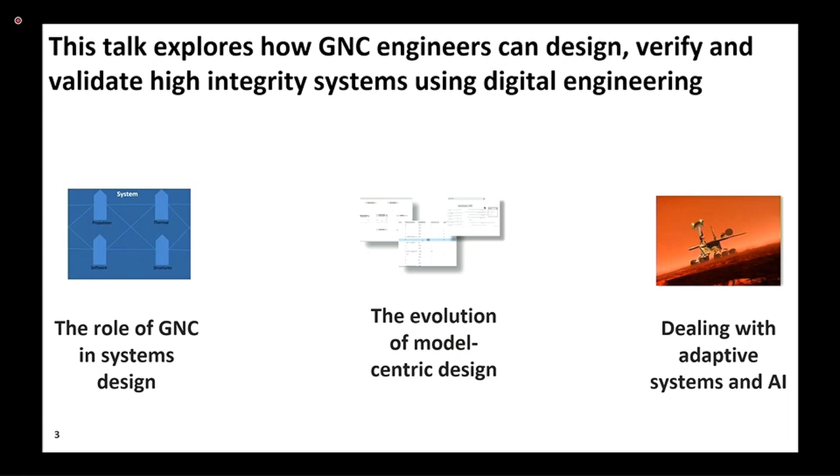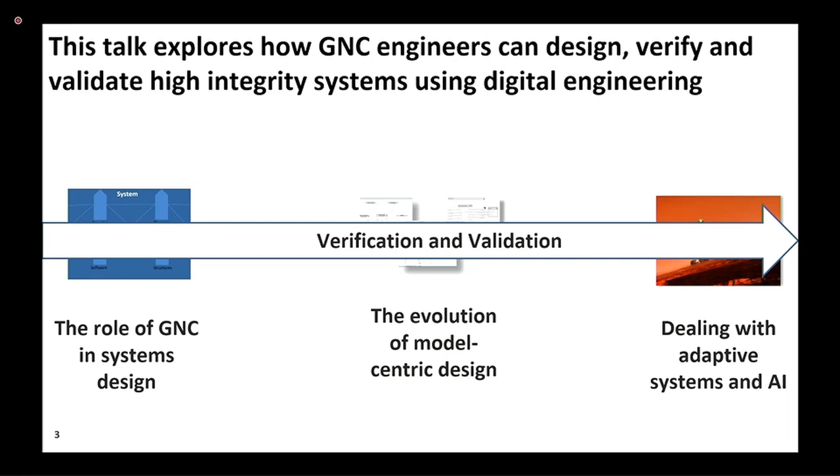And finally, it's hard to imagine a digital engineering talk these days without mentioning the role of artificial intelligence, machine learning, and deep learning specifically. AI is slowly but surely creeping into our industry. We'll highlight how and where it's being used, and some of the current challenges and directions of future research. And again, because we're dealing with high integrity systems, we'll interleave this talk with considerations for verification and validation, or V&V.

So let's dive in. I once worked in a department called Flight and Controls, whose engineers were generically referenced as Attitude Control Subsystem Engineers, or ACS. Yet despite the name of the department, one of our key deliverables was the Algorithm Description Document, or ADD, which defined every algorithm running on the onboard computer for every subsystem.

Now, how can that be? Well, there are a couple of reasons. First, ACS and/or Guidance Navigation Control, GNC, is incredibly strongly coupled with other disciplines. We can look at a simple example to highlight that.

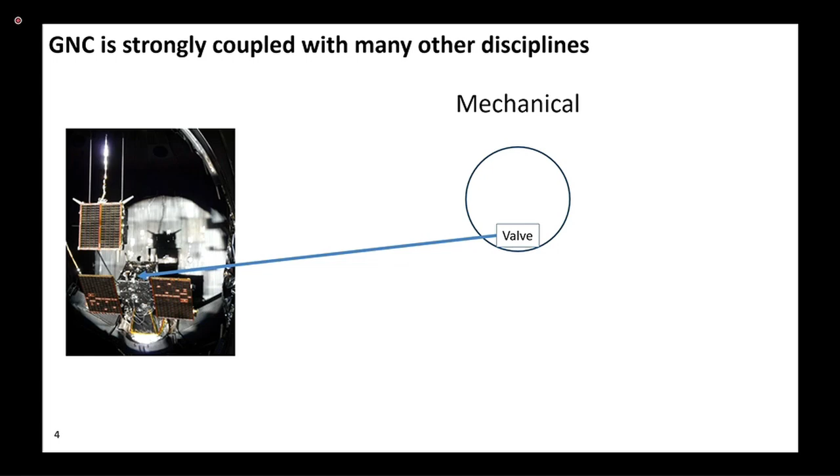On the left of the screen here, we see a spacecraft, and on the spacecraft there's a valve. Now, the valve is by nature a mechanical system, but in this instance it's also part of the propulsion subsystem, since it actuates a thruster. Because the valve is electronically actuated, it's also part of the electrical subsystem. Because it's commanded remotely, it's also part of the command and data handling subsystem.

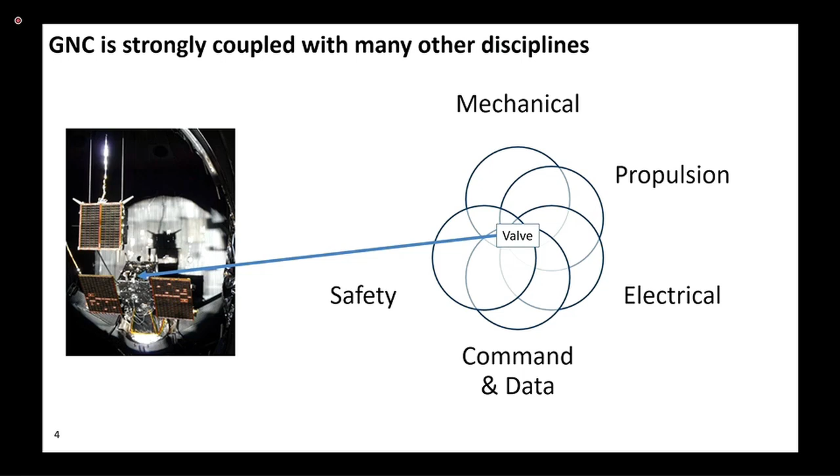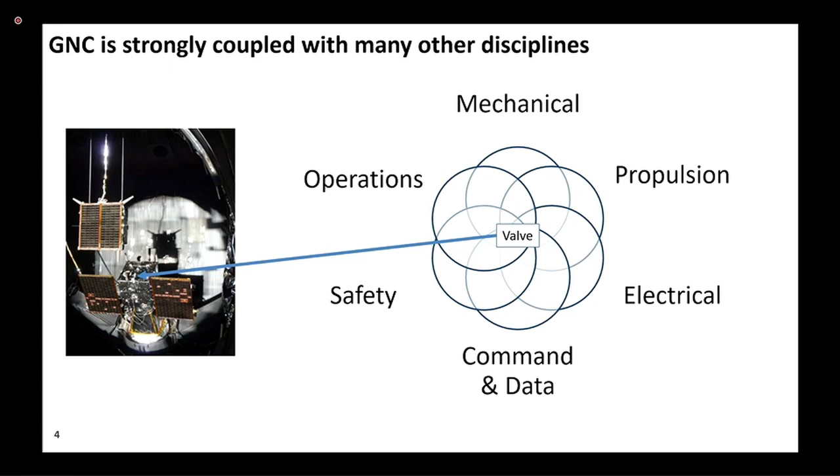Because it moves a vehicle, it's safety critical and part of the safety folks' concern. And of course, there's the operations consideration—the operators are the ones that'll actually actuate this. So all of this for what's really fundamentally a GNC, or attitude control enabling device.

So that talks to the coupling. The second reason GNC is so important in our flight software systems is that early onboard computers and software were mainly driven by GNC requirements. Over time, other subsystems became included, but GNC continues to have a fairly dominant role in onboard computing.

And onboard computing these days really orchestrates everything at a system level. Now, despite the interconnectedness of our systems, the truth is that engineering today, for the most part, still can remain highly siloed within domains. I worked on a program where I had to interface very closely with subsystems engineers that actually worked for the same company I did, and had a direct interface to my system.

Yet if you looked at the org structure, we met at the program manager. So obviously there can be structural and organizational challenges to working seamlessly together, because these two groups had different budgets, different schedules, and those all had to be negotiated.

Now, I also worked on a clean sheet design where this problem was recognized early on, and the program put all of the engineers in one large room so that they could all work together, sit next to each other, and report to the same people. And even though the physical environment was set up in a very collaborative way, I found that instinctively engineers would still put their heads down and work on their own systems. So there's both an organizational and a cultural tendency to work within these silos.

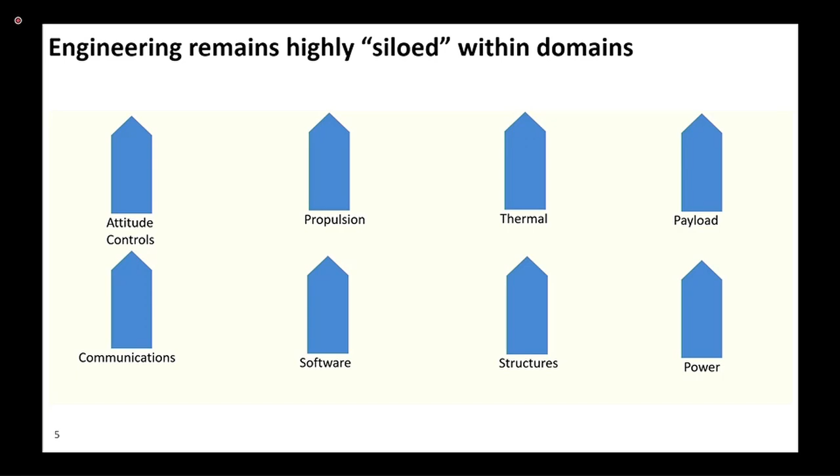Now, making sure that things work at the system level, of course, requires system level thinking. And systems thinking, as I call it, requires breaking down the silos. What I mean by systems thinking is considering the interconnectedness of all the components in the system. And a fundamental concept of that is that a component can behave quite differently, and sometimes in unexpected ways, as part of a system than it does in isolation.

You can think back to the valve example, right? On its own, it just opens and closes. But in that particular location on the spacecraft, it moves the vehicle. Now that's a pretty obvious example.

We could imagine this comms antenna, right? Where on its own, you think of it as enabling communications between the spacecraft and the ground. But if you look at it a level deeper, it does more. It actually drives requirements for GNC pointing, was one thing. And as soon as you deploy it, it actually happens to be a disturbance generator for GNC as well, right? It creates drag, it accumulates momentum. So it's a momentum accumulator depending on your role.

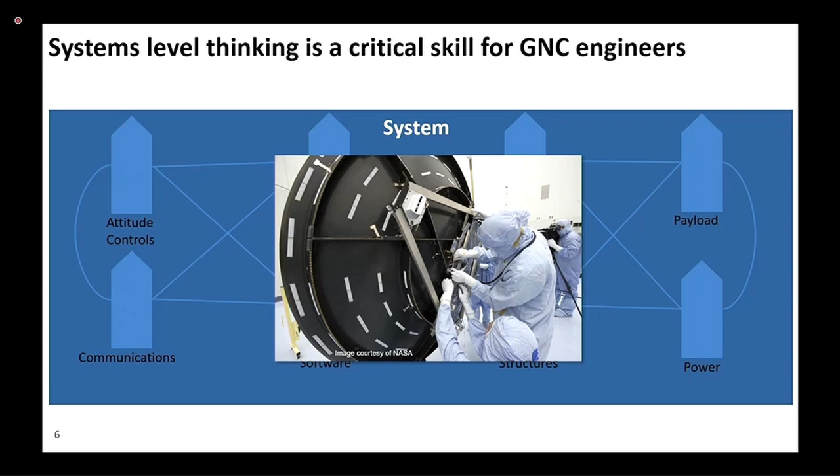Now, those two simple examples showed how one component affects multiple subsystems. We'll take a look at a slightly different angle through a program that I used to work on, ISS.

You want to minimize your drag in order to minimize propellant use. You also want low momentum accumulation, so you're looking for a drag balanced attitude. Crew safety is paramount—you want to minimize exposure of the pressurized volume cross sections to the velocity vector to minimize the chances of an orbital debris strike.

You have to be power positive, so there's the optimization of the angle of the solar arrays to the sun you need to consider. It has to be thermally acceptable to ensure components don't get too hot or too cold—actually, even to prevent expansion or contraction of the metallic structure, which could be a problem. And of course, you have to maintain communication, so you have to point the antennas at the tracking and data relay satellites for the ground.

Now, all these trade-offs are interconnected. This type of problem can't really be solved by a GNC specialist alone. It requires multiple subsystem input and systems engineers who are system thinkers.

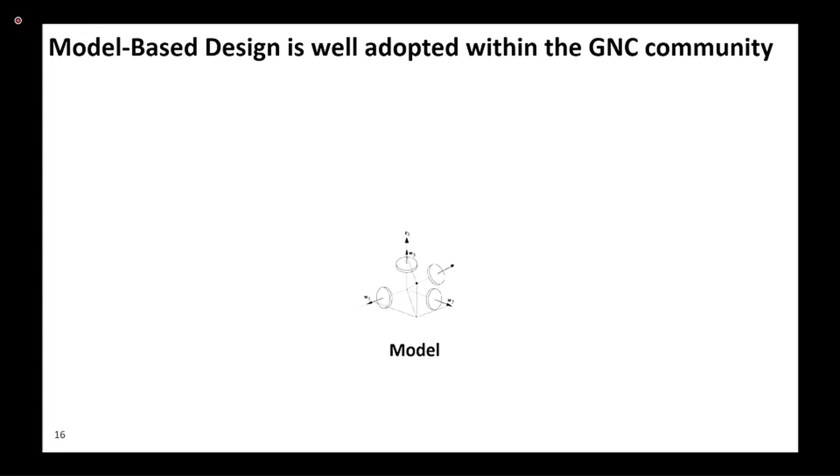I'll start with model-based design, which is well adopted already within GNC, like I mentioned, particularly in Europe and North America. And many of you are already using model-based design for components and subsystems, and even using model-based design to rapidly integrate with hardware for rapid prototyping workflows.

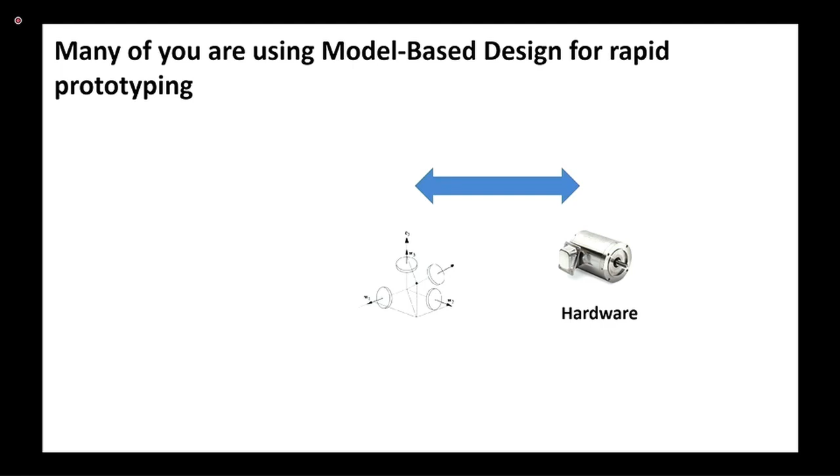And some of you are using model-based design to automatically generate code straight out of your models, whether it's production flight code in some cases, or maybe C, C++ source code of your plant models that you can use in your real-time test environments.

So you can see that the hardware and the software domains, of course, remain very important. But the main difference is now that the model is at the beginning and center of the design process and serves as the gold reference of truth.

And we all recognize that integrating hardware and software can be difficult. And for successful model-based design organizations, the model can really help bridge this gap. Because before you bend metal, you model your hardware. Before you generate code, you model your software. And in your modeling environment, you have the ability to test the two together.

Now, I'd say that somewhat a downside of model-based design as it's currently practiced is that most organizations remain constrained to the component and the subsystem level in their modeling, which makes system level analysis using model-based design difficult.

And that's where model-based system engineering comes in. It's also pervasive in the space industry. And the idea behind MBSE is to build a digital model and a modeling tool that formally captures the relationships between requirements, architecture, and then both the functions and the components that make up a system. MBSE can capture multiple aspects of a system, including the physical, functional, and behavioral allocations.

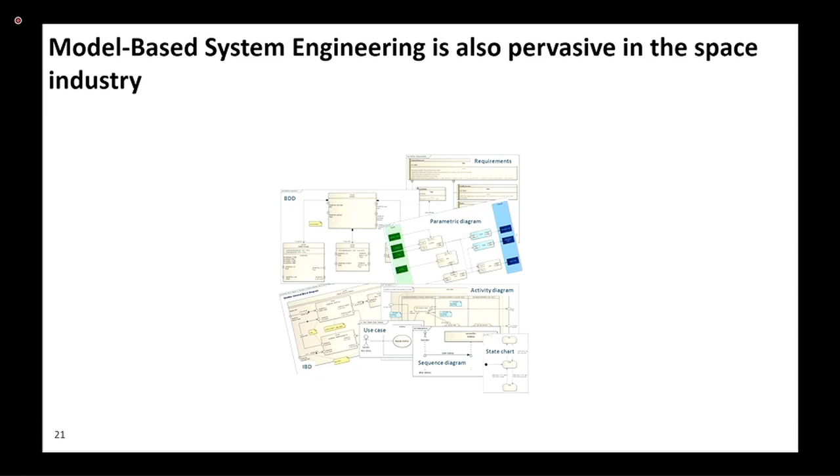Now, in the old way of doing things, where paper documents were the primary artifact, if I encountered an issue with the design and wanted to change something, I would go to a change board and the chief engineer would ask me, does this impact anything else? And I'd say, no, it doesn't impact anything else.

But how can you really prove that? Oftentimes engineers with a good reputation may have found their proposals approved more often. But having a digital model that includes the relationships between the components and the dependencies between the requirements is a game changer for impact analysis, and it greatly improves the agility.

In fact, in the old way, there was sometimes great resistance to change, even in the presence of defects, because of the very real worry of introducing new ones. And this applies even months or years before a launch date.

So I would argue that the processes that we had built and the tooling that we had often led to suboptimal designs and the stifling of innovation.

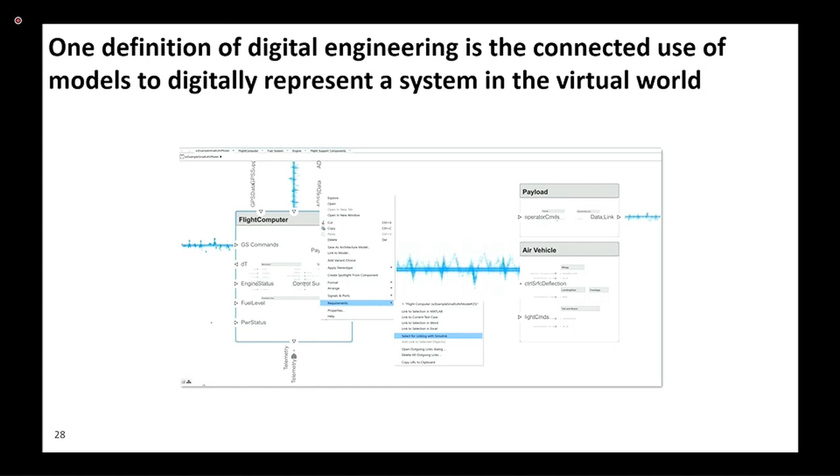Now, I want to take a brief detour here to address a common statement we hear from GNC engineers, which is, hey, we've been doing digital engineering for decades. We know that we can't test our systems in a lifelike zero-G environment here on Earth, so we've had digital models for decades and decades that model what we do.

That's all true, but when I'm talking about digital engineering at a higher level, it applies at more than just a subsystem level. And I would argue that we've gotten very good at digital engineering at a subsystem level, but there's a digital thread that's missing between not only subsystems, but also life cycle phases. We'll get into that a little bit more.

Now, digital engineering has the potential to fundamentally change the way we design, build, and verify systems. Currently, it looks something like this, right? We design, then once the design is approved, we build the system, and then we do integration and test. And in the last phase, it's not uncommon for that to consume maybe half of the total program cost. There's a great deal of variability, but that seems like a reasonable ballpark.

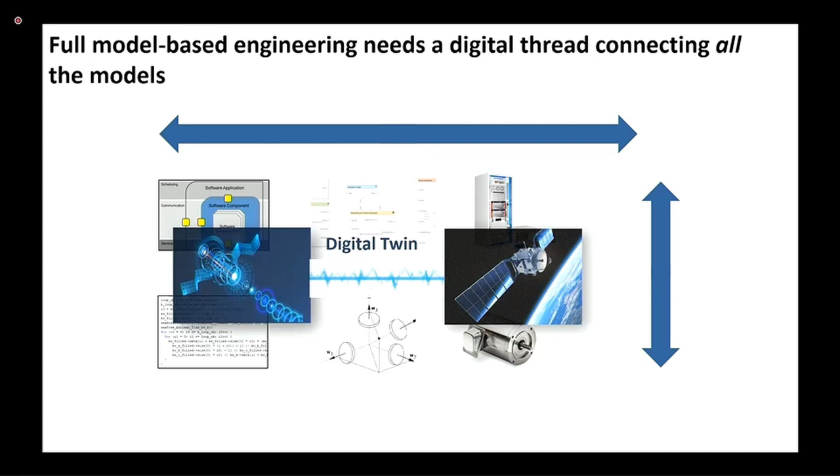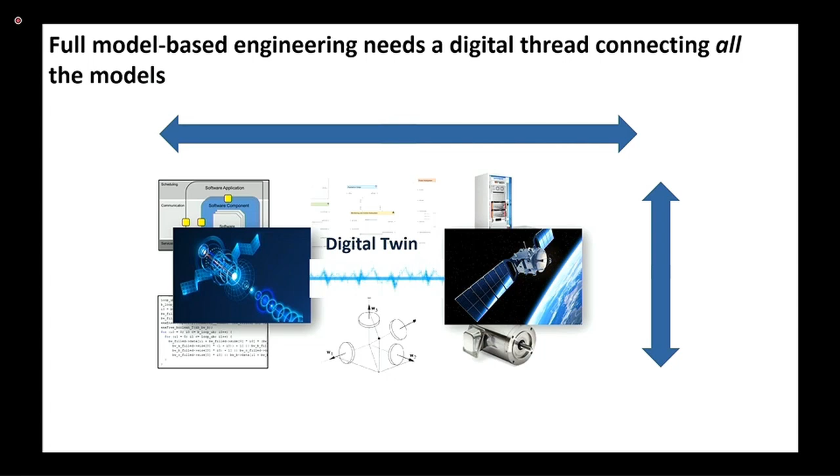If we develop our skills and navigate the full realm of digital engineering along both axes—one going from component to system level, the other from hardware to model to software—we'll naturally end up producing a digital twin. What I'm calling a digital twin is a digital representation of the physical system, so close to reality that it can be used in place of the real thing for test and analysis. Importantly, it's also updated with data from its physical twin to validate the model, which is why the connection to hardware is so important.

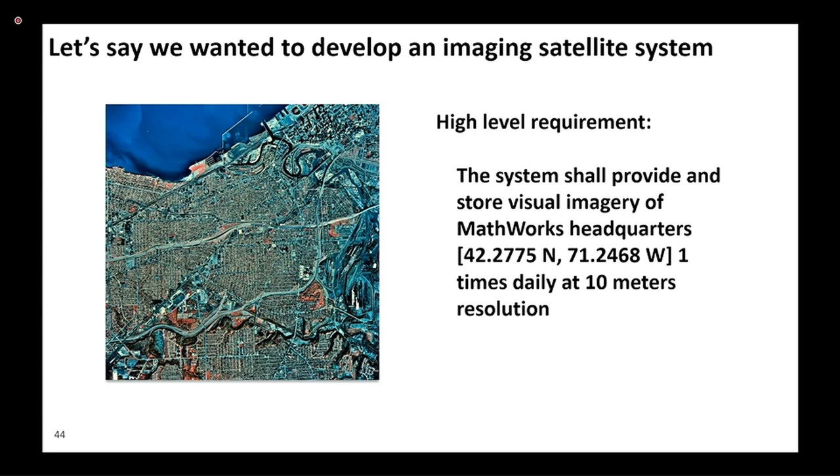Let's walk through an example. Say we wanted to develop an imaging satellite system that provided visual imagery of MathWorks headquarters at some frequency and resolution. We'd start by sketching an architecture—a space segment, a ground segment, some external providers like launch. But because we're doing this using digital engineering, instead of a napkin, we'd use a tool.

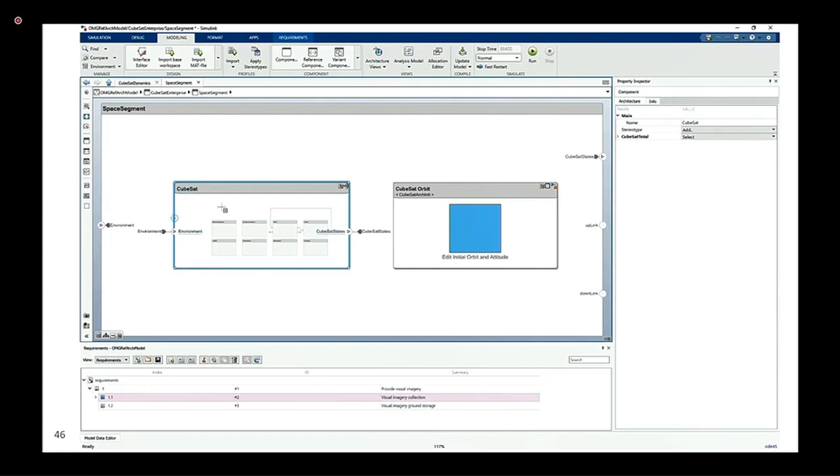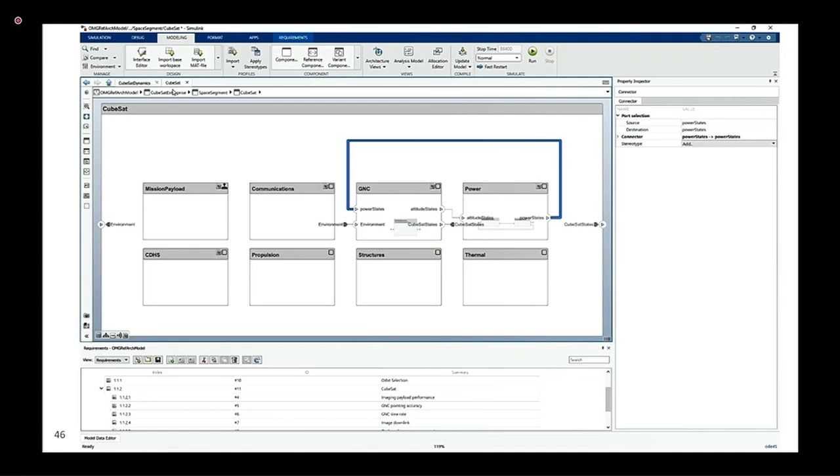Let me open up my MATLAB and take a look at what such a model could look like. Here we see the model—same as in the sketch. To it, we've linked some high-level requirements associated with high-level components. The purple boundaries show the relationship between requirement and component. As we drill down into the architecture, we can define lower-level requirements and map those to lower-level components and subsystems, and also define interfaces to connect the subsystems and assign attributes and stereotypes to those interfaces.

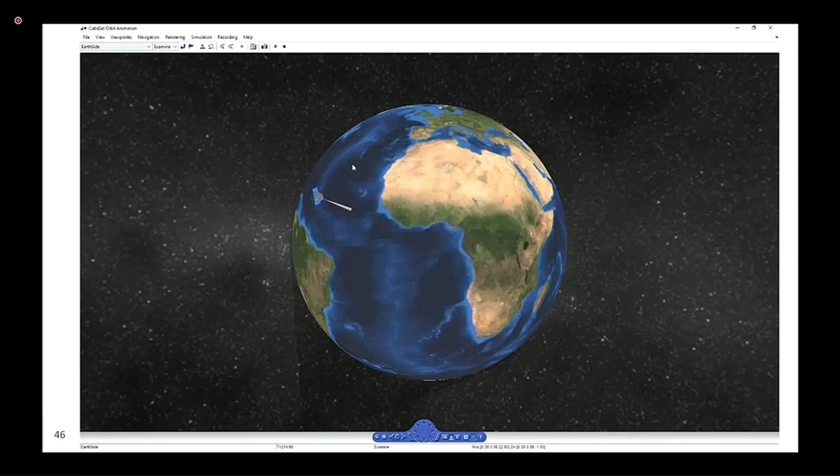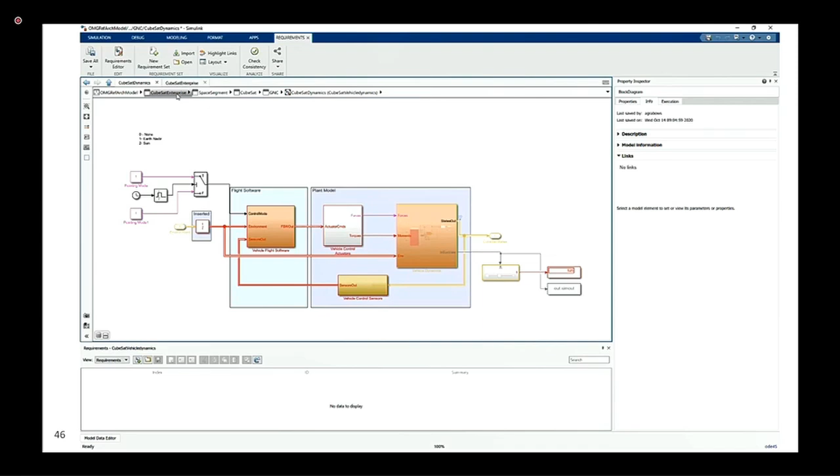The key difference here between this and traditional model-based system engineering is that you can simulate it by hitting the run button. So here we see the satellite actually flying around and the system simulating. If we continue to look under the hood and dive deeper into this model, we'll see that what enables the simulation is a Simulink model right here, directly linked and connected to the architecture. So whatever subsystems we've defined with enough fidelity to have a simulatable component, we can now simulate together.

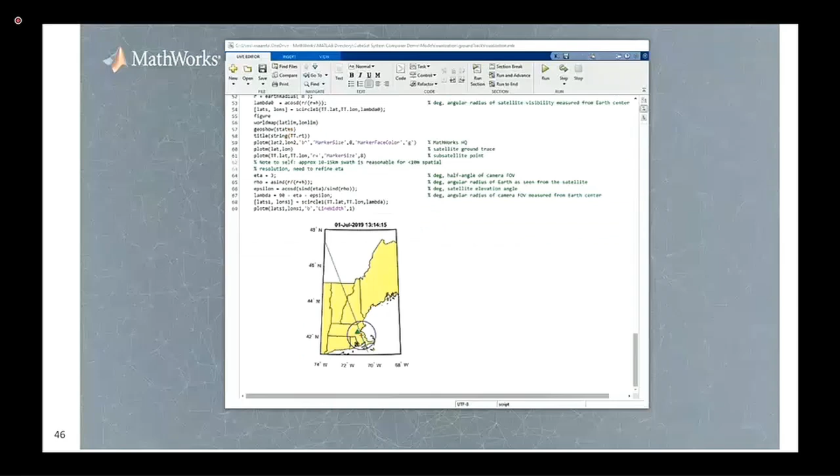We can actually use these simulation results to do further analysis on the architecture and design. Here, for example, I've taken the results of that simulation and I'm bouncing them against the requirement to fly over the MathWorks headquarters. I've used the results of the simulation in the orbit together with static parameters I've put into the architecture describing the attributes of some batteries and photovoltaic arrays, to do trade studies for battery and power system sizing. These are the types of things you can do when you effectively combine the worlds of simulation and architecture and system engineering.

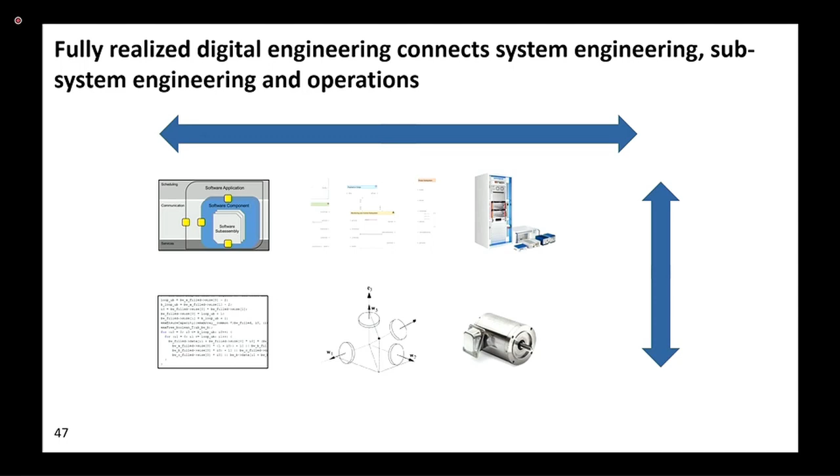To summarize, the vision of digital engineering is to connect systems engineering, subsystems engineering, and even operations across subsystem domains and across life cycle phases.

I'd be remiss if I didn't highlight that digital engineering investments require not just investing in digital technologies or software, but also investing in the people, to enable the workforce to be productive in the digital world. Much of this software is not trivial. Just like I wouldn't buy my children a car and expect them to learn how to drive it themselves, we shouldn't expect to buy our workforce complicated technology without providing the training and resources to use it. Ultimately the measures and metrics of success are people measures like productivity—are they meeting the right outcomes, are the milestones happening?

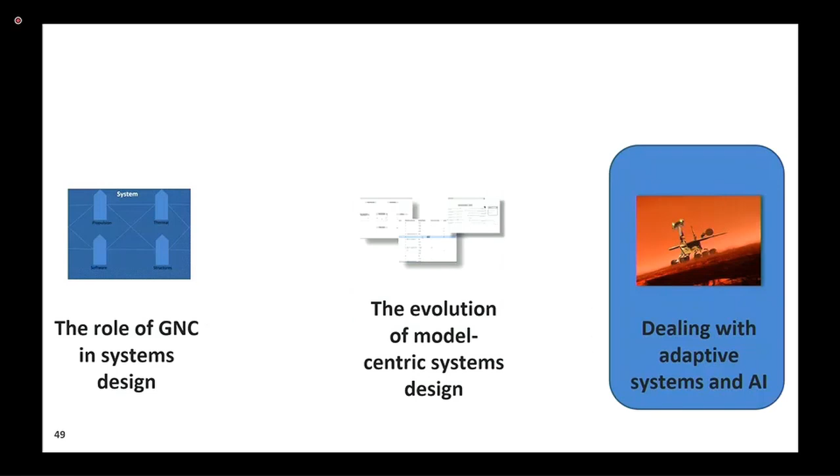All right, so now let's get into our final section and take a look at how AI and machine learning fits into this vision. I'll start with some basic definitions just to level set.

Artificial intelligence, the umbrella term here, is simply the capability of a machine to imitate human behavior. I'd argue that in the space industry it's closely linked with the concept of autonomy, or vehicles able to perform increasingly complicated tasks without human intervention. That's been a key attribute of spacecraft for decades, but the algorithms that enable autonomy traditionally have been designed manually as expert systems rather than through machine learning.

Machine learning is distinct in that it uses computers to learn directly from data without utilizing first principles. So you could say that machine learning model learns much like humans would as children. We observe the world around us, we form correlations, we identify patterns, and we can do this without having an understanding of first principles of physics and mathematics. We don't need to know Newton's laws to learn how to catch a baseball.

Deep learning is a subset of machine learning. It's associated with neural networks composed of many layers of processing. The more layers there are, the deeper the learning. Each layer is a nonlinear processing unit that transforms the data coming into it and then passes that transformed data to the next layer, which transforms it again, et cetera.

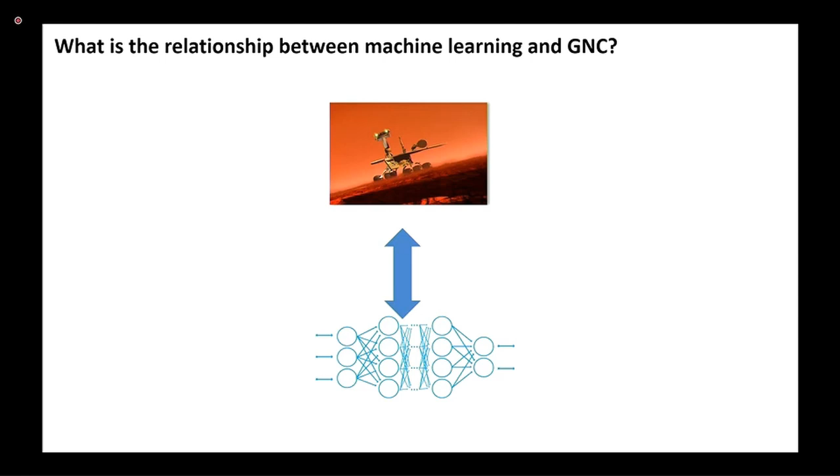Now, this is a talk for a GNC audience, so let's look a little bit more closely into the relationship between machine learning and GNC. Deploying machine learning in space, as opposed to on the ground, requires pragmatic applications. I'm going to talk about this a little bit in terms of the DIKW pyramid, or the wisdom hierarchy as it's sometimes called. So we can ask ourselves the question of what level of the pyramid does, or should, machine learning live at.

If you ask Hollywood or the media, they would put it all the way at the top, right, where AI is portrayed as containing some kind of pre-programmed wisdom and accumulating knowledge and figuring out how to do things, and then take over the world.

But the reality is that the sweet spot today is probably somewhere near the information tier. I'm talking about things like perception and estimation based on input data. I'll provide a couple of generic examples to show what I mean.

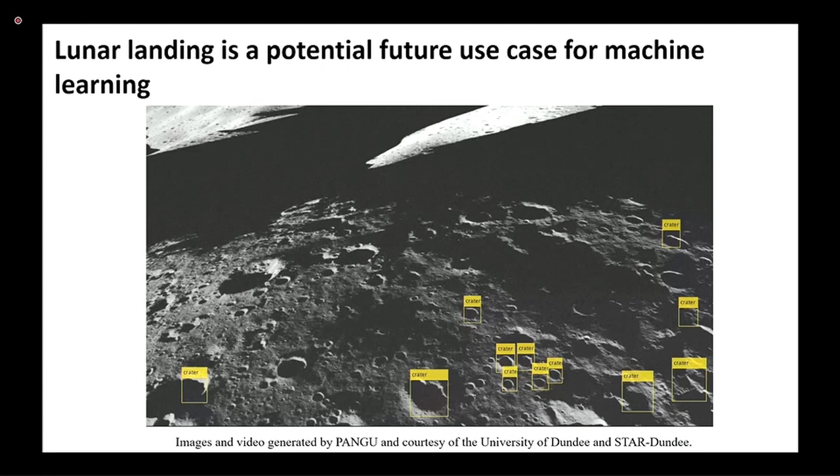Now, we know that there's new machine learning models and deep learning models coming out all the time from multiple different sources. Relatively recently, a standard called ONNX, which is the Open Neural Network Exchange, has emerged, and something that we support. This standard is helping engineers work with the different models from different tools and bring them into the MATLAB environment if they so choose.

Now, why would they want to do that, bring the models into MATLAB? Well, it's because evolving AI and machine learning from academia and tech demonstrator type projects into actual production projects involves so much more than just creating and training the model. The full workflow, all the way from data pre-processing through deployment onto the edge or maybe onto enterprise or cloud systems, is going to be increasingly important.

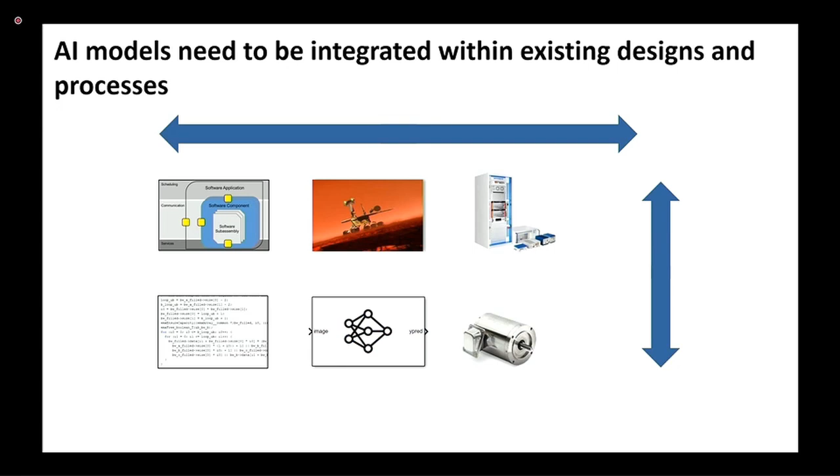We've spent almost 50 minutes talking about systems thinking and the criticality of modeling algorithms as part of the system at the system level. I think that's also a critical piece of actually integrating AI. What we will want to do is tie our machine and deep learning models directly into our modeling environment that I discussed earlier. For example, through this image classifier block that can be put into our models, so that they can become a seamless piece of the digital engineering workflow. I think ultimately, not yet, but ultimately, that's what we're going to see.

The ease of integration and deployment is really key to the productization of that, which is why we're investing and have already invested in code generation capabilities for machine learning models, as well as cloud and enterprise system deployment for ground-based deployments.

So the MathWorks approach is we approach the AI challenge by trying to enable engineers and scientists to incorporate AI across their entire system design workflow. I believe that's why analysts like Gartner have named MathWorks for the second year in a row as a leader in the Magic Quadrant for data science and machine learning platforms.

Now, the elephant in the room that I haven't talked about yet when it comes to machine learning and deep learning deployment is the verification, validation, and certification. That's probably the biggest bottleneck today to deploying machine learning on critical systems. And honestly, I do not believe that we've figured out how to do this yet.

This is an area where it looks to me that commercial aviation is actually leading the way here a little bit. There are some working groups, including the SAE G-34 and the EuroCAE WG114, that are set up to tackle and address this issue that MathWorks participates in. And EASA, which is the European equivalent of the FAA, also published a concept paper recently that'll give you an idea of where aerospace as a whole is with respect to certification. And while we're making strides, I think there's still a long way to go.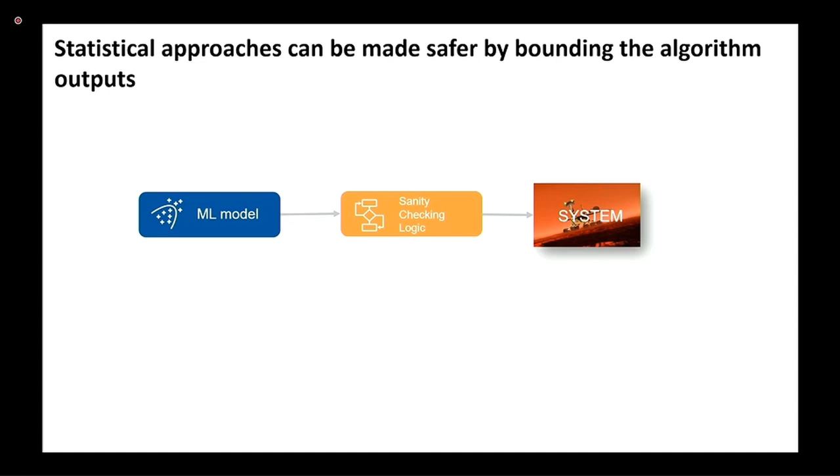And we can even go a step further and design a traditionally designed algorithm running alongside our machine learning model, which may not have the same capability. It probably won't be as accurate—otherwise, why would you bother having the machine learning model? That can serve as a more sophisticated sanity check, incorporated into some voting logic to make sure that the outputs of your machine learning are bounded.

So again, to summarize the conversation started here, a few approaches might be black box testing to statistical requirements, adding sanity checks, and dissimilar redundancy to bound the outputs.

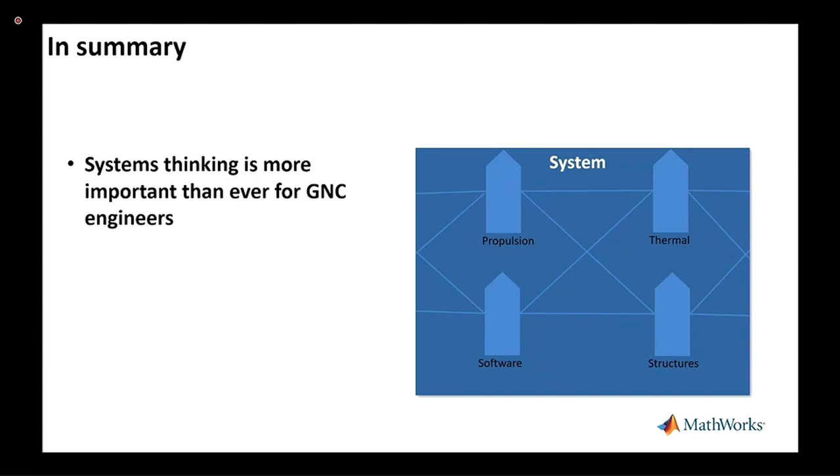All right, so that concludes the machine learning portion. To summarize, we've talked about systems thinking and how the role of systems thinking is becoming more important than ever for GNC engineers, in particular because of how integrated GNC is with all of the other subsystems on the spacecraft. We've talked about fully realized digital engineering that includes and expands upon model-based design and joins model-based system engineering and model-based design for a fuller picture.

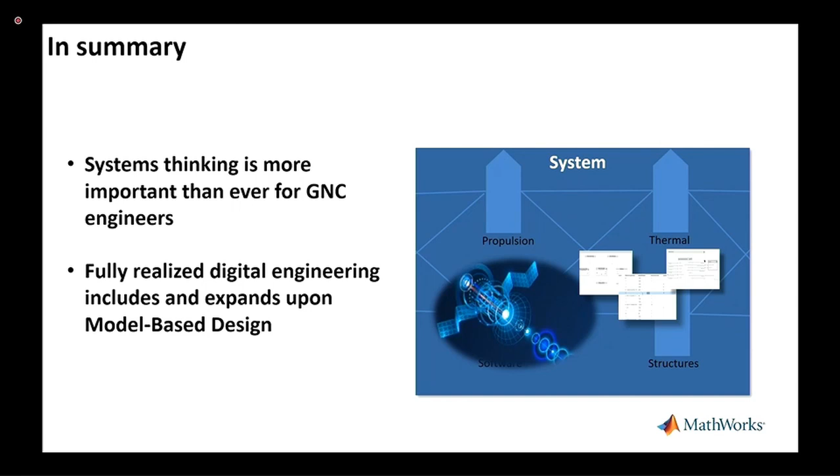And also we talked about AI and how we as GNC engineers should prepare not only for developing the AI algorithms, but also how to actually apply them to production systems and be part of the system, especially once we crack the nut of V&V and certification. So thank you very much for your time. That concludes my talk today.

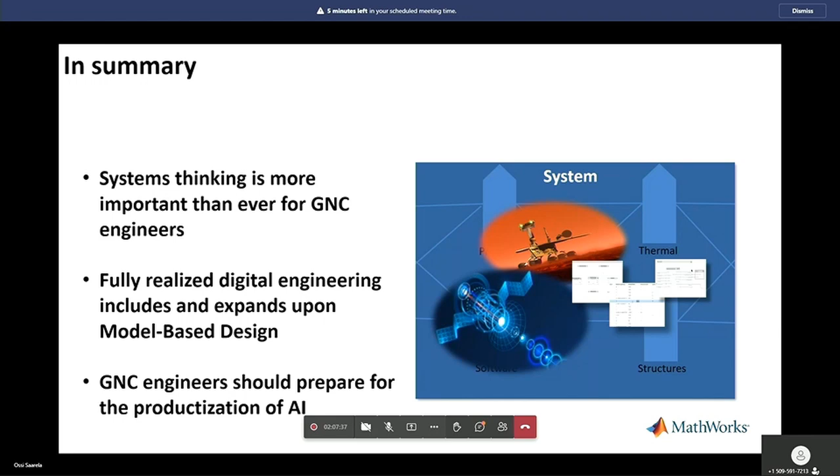Back over to you, Neil. Yeah, all right. Thanks, Ossie. Yeah, so thank you very much for sharing some of your knowledge and insights into this brave new world of digital engineering as it's applied to GNC.